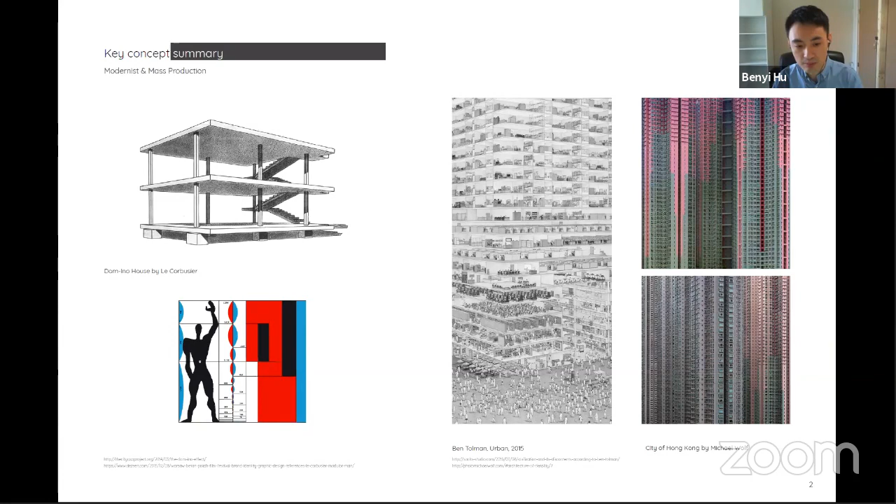Architecture under modernism's influence adopted a top-down perspective in design, as a visionary planner that often homogenizes the living condition by treating the user as generic instead of diverse individuals.

Over decades of technological evolution, digital technology has transformed the fabrication method from mass production towards mass customization. Different design fields also adopted design customization as an attempt to provide a tailoring service. The digital continuum presents a new degree of flexibility in design and fabrication.

However, this feature of technology is rarely being used to respond to the social diversities of the users, but is mostly being adopted in the conventional central decision-making process to achieve a wise plan imposed by the architect. Hence, it is necessary to deploy the advanced technology of mass customization and parametrics for a personalization culture in architecture.

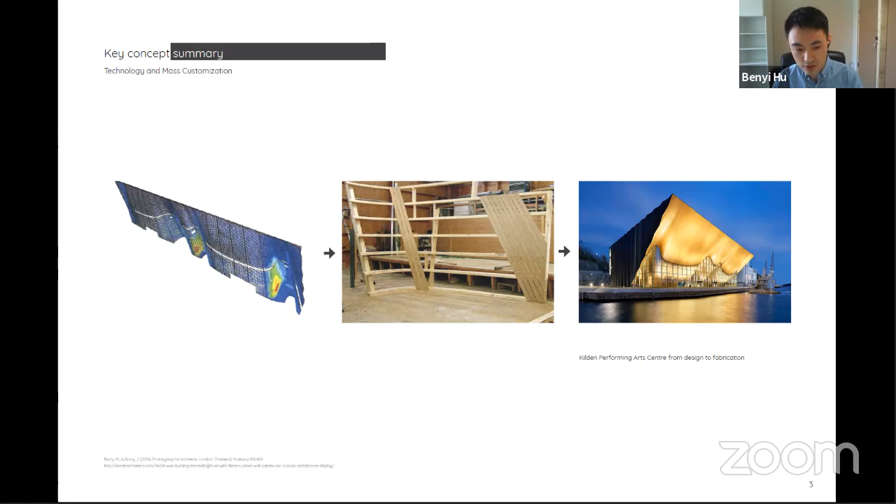A highly controlled built environment will lead to a homogenized and standardized living condition, often controlled by a small group of designers and their client. On the other end of the spectrum, a complete user-driven environment, as demonstrated by Kowloon Walled City, lacks regulation and systematic design strategy, which tends to become chaotic.

Architecture should find a balance between the two separate forces of control, allowing the architect to maintain its leadership role in the design, but offering flexibility for users to customize their personal space.

John Habraken's support and infill approach initiated a flexible design attempt to address the spontaneous variety of user preferences and unpredictability of future use. His idea of balancing the separate forces of control is based on his theory of natural relation, that built environment resembles an organism more than an artifact.

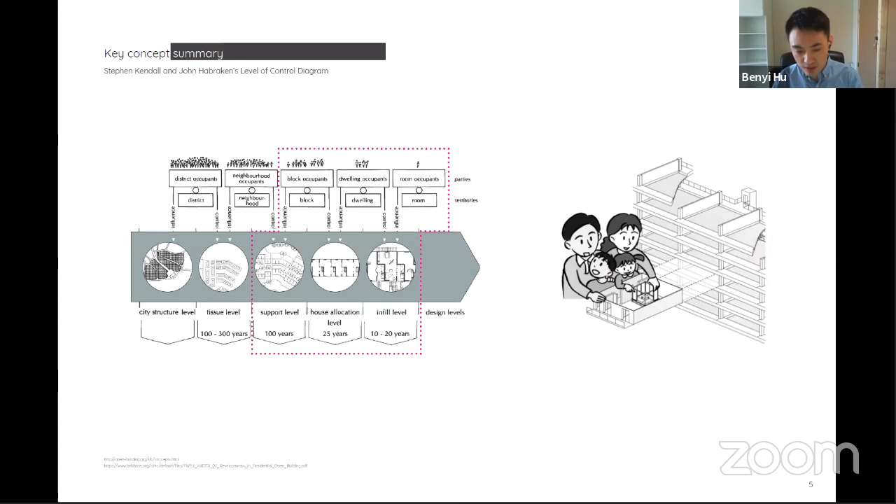The public engages with the built environment by acting on it rather than observing it. Habraken suggested a separation of different levels of control in the built environment according to the lifespan and volume of users. The three separated levels were created for his design of mass housing.

The support level is the overall structure and mechanical services. The infill represents the unit interior, such as partition wall and furniture. Lastly, the allocation layer is the boundary between the units.

This approach was intended to give users control of customizing their living environment without interfering with other fixed components of the building. However, due to lack of solution for the allocation layer and the void of systematic structure to guide the changes, most...

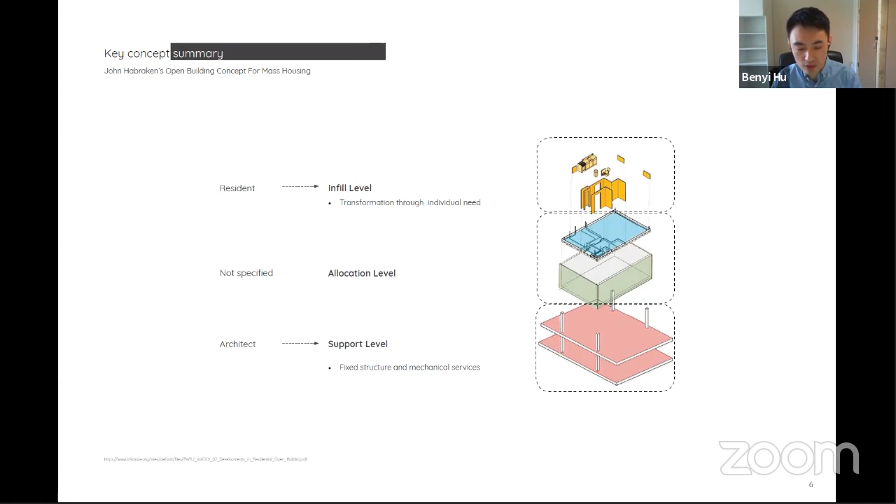open building projects remain fixed after construction and fail to deliver the natural relation as a diverse built environment that accepts changes and transformation. In addition, this dichotomy structure with only support and infill layers has undermined and limited architects' role in design to only the building shell, the vertical space division, and the service utility.

New technologies can be used to improve upon John Habraken's support and infill approach for the design of high-density housing. Parametrics can be used as an iterative design tool for user participation through establishing rules and relations.

An alternative design method can be developed to include the role of the user as part of the design decision process, but also maintain the architect's responsibility as a designer and planner of the built environment.

Therefore, incorporating the diverse needs of the users to customize the unit boundary through communication and neighborhood negotiation, guided by the parametric system. The role of the architect can also be expanded in the support level, from simply the design of fixed structure and mechanical services towards designing and planning an active neighborhood relation, as well as the functioning of a community to incentivize public interaction.

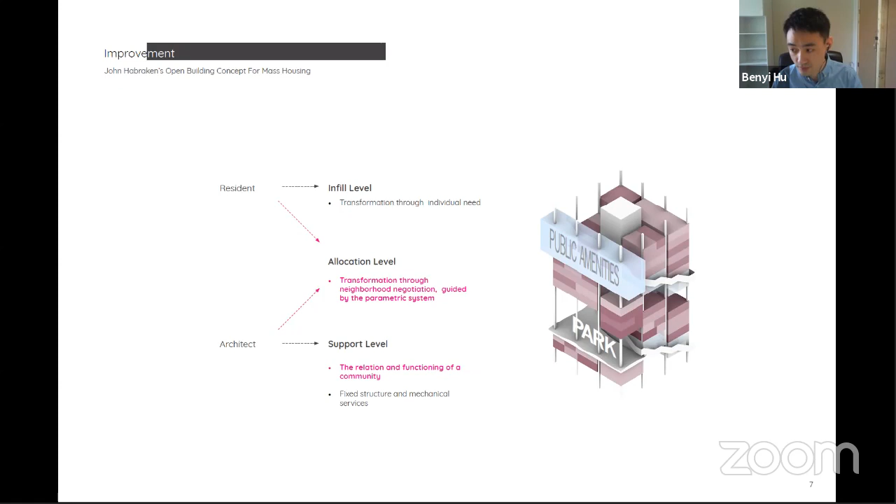This thesis investigates a network approach for participation, where the architect creates a parametric framework that reflects the different categories of users' needs and provides user access to the framework to customize and personalize their individual space within set limits.

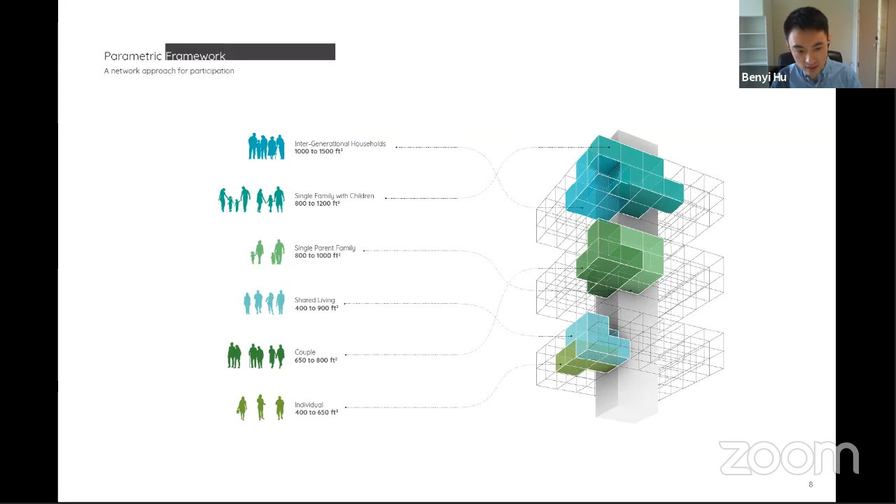A 4-meter grid system was proposed as the initial support level. The choice of center core design allows the majority of structure and services to be located either closer to the center or the edges of the floor plate, creating an unconstrained space between the corridor and the building facade.

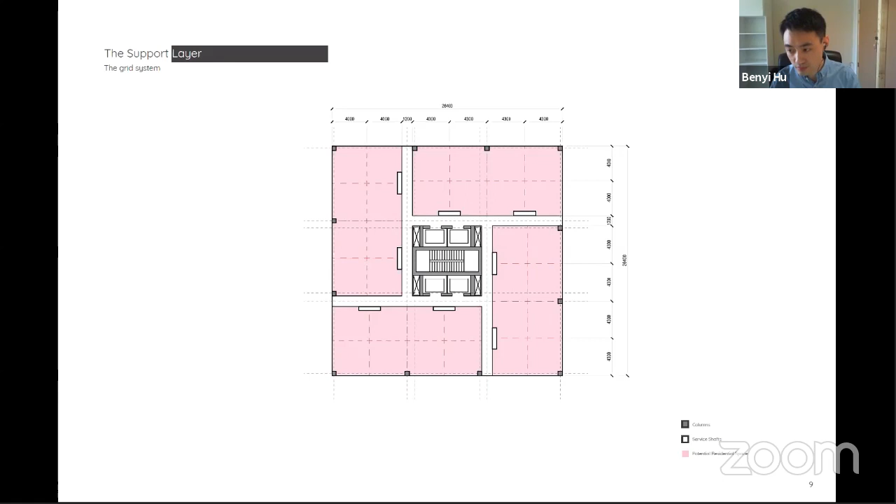Allowing future partition walls or demising walls to shift without interference, unit entrances are skip-stop for a multi-level design, providing various interior layout options and increasing opportunities for future changes. A parametric system is then created to work with the grid system to ensure each unit has access to the corridor as well as sufficient natural light based on the overall floor space and building envelope ratio.

The algorithm ensures the nearest cube from the source cube is selected first, providing efficient unit design with higher degrees of customization.

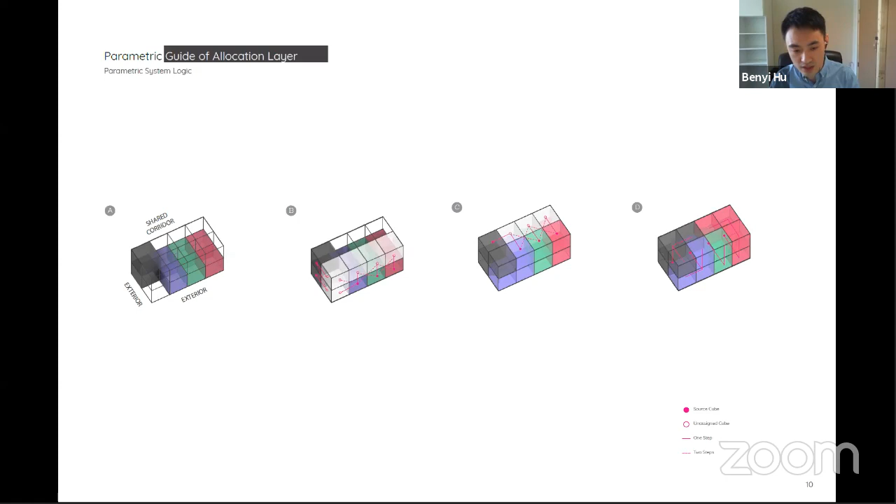When the user first purchases their property, the parametric model offers the owner an input of their spatial needs, then pairs and matches the user with other existing users.

The system was designed to treat the bulk of the vertical connected block as a single entity for unit subdivision. As shown in the video, with different input of unit area and total number of units, the parametric model can assign and arrange the space cubes to different households.

It ensures that the entrance, marked by the white dot, is skip-stop, and most entrances are positioned at the center level of the unit. When changes are required after residency, the parametric model can be deployed to offer users different configuration options or verify the input change of allocation to maintain a satisfactory living condition for all residents.

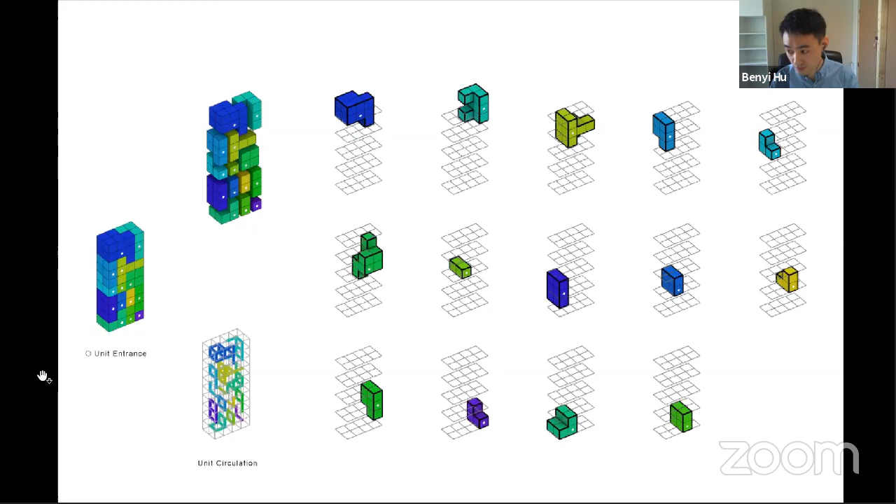Parametric design offers architects the possibility to design with variables for an interrelated and open-ended system. It operates with continuous associative geometry, which can be adjusted through the change of its input value without recreating the system.

The result of such design is therefore not a single object, but according to Gilles Deleuze, a class of objects that are all different as one for each set of parameters, yet all similar as the underlying function is the same for all.

Only a class of object can accommodate different scenarios with different variations.

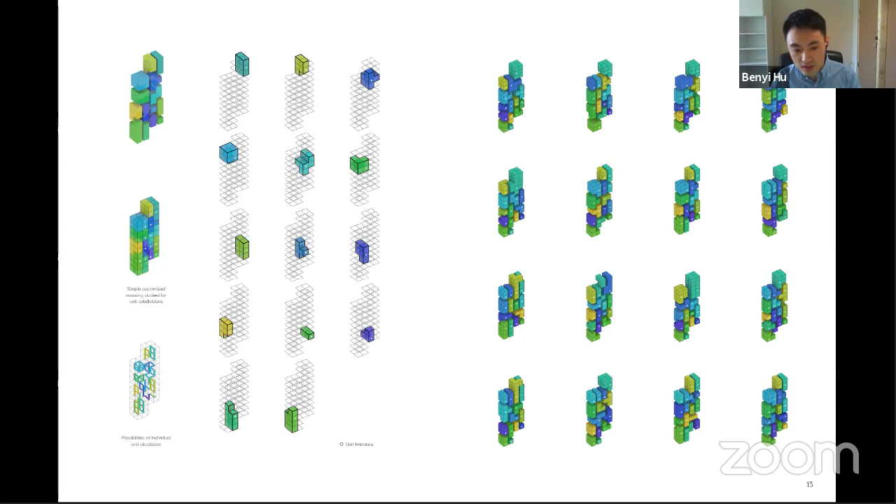I also tested this parametric system with different forms. In this one, the source block is vertically shifted. This parametric function can even be used with higher complexity of form that are partially carved out.

So instead of designing from a top-down perspective as a form of mass production with limited variation and identical copies of living conditions, the design of high-density residential could be optimized with our technology to adopt the essence of mass customization and parametrics for a personalization culture in architecture.

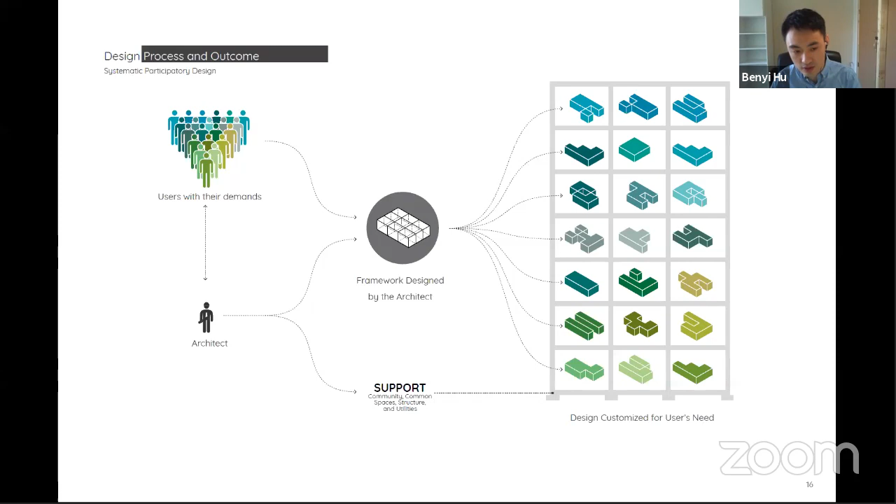The contemporary high-density residential projects have compacted the living space of society and shortened the distance among residents.

However, a denser living environment did not promote a healthier community, but instead isolated individual households into their personal space, bounded by the demising wall between the units. This untouchable space boundary has created a strict physical separation between the units, reducing the chance of cross-connection and causing segregation.

Therefore, having a flexible allocation level enables residents to resolve changes in their spatial needs, making community space an outcome of neighborhood negotiation.

The parametric system can offer guidance for changing the allocation level. Users are allowed to shift the space boundary at increments of 860 millimeters, which is the modular spacing.

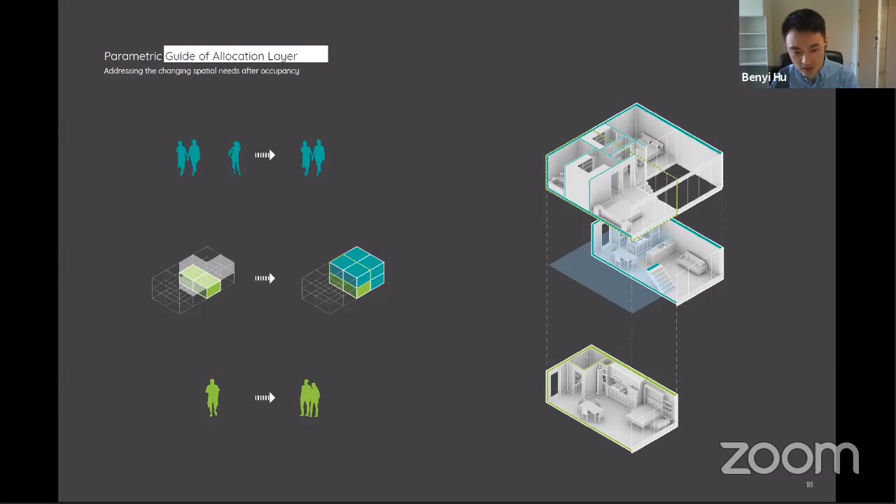Of course, an entire space module can also be transferred for larger space arrangements, such as an additional bedroom with a closet or a den as office space. In this case, when the Green resident got married, they could purchase the space module above the unit to expand.

Space could not only be transferred among units, but also shared. By permitting shared space, a commonly used space could not only offer value to others, but further enhance the relationships among community members. Therefore, two small student units with individual kitchen, dining space, and living room that is barely used...

...can be transformed to have a shared kitchen and additional bedroom to accommodate another student.

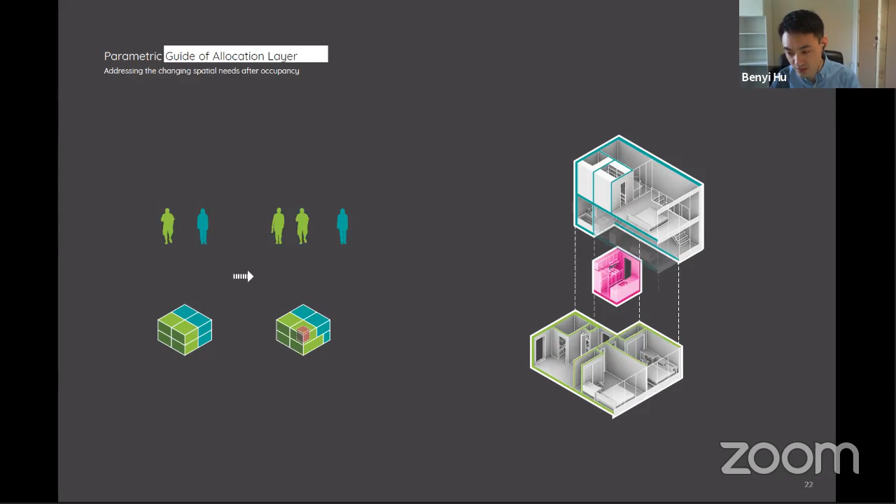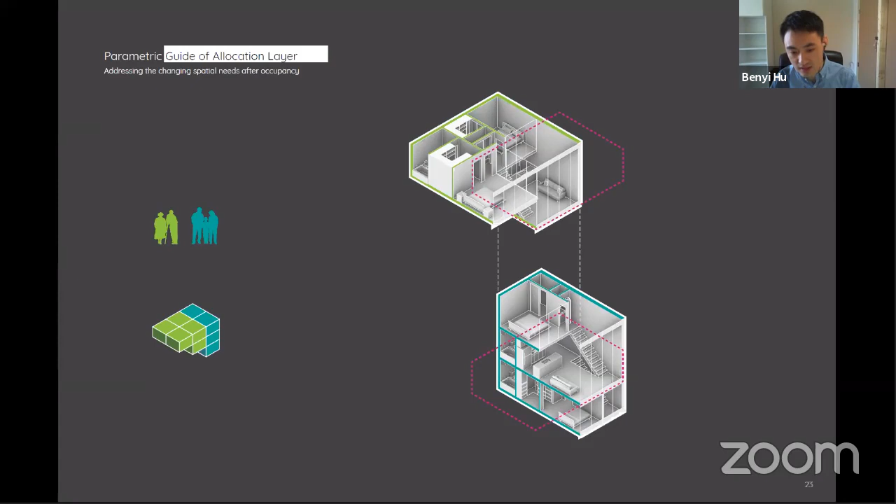This example shows the possibility that shared space can provide for transgeneration families. The contemporary residential housing design is limited in the size of the unit from a studio to 3-bedroom. Therefore, the transgeneration family can only live separately in 2 different units. However, a shared space allowed the 2 units to combine the kitchen and living room for common activities between the family members.

The mass production mindset has treated high-density residential units as mass-produced commodities with no interest to respond to individual need and failed to support the development of long-lasting relationships among the residents for a stable and healthy community. Therefore, the unit became a commodity that is often resold within a short time period.

The changing allocation level may not be able to offer all the changes of spatial needs. However, it does offer a bigger range of possibility when changes happen. It allows the community members to act as a collective group to resolve their issues. Consequently, a dense living environment could transform from a device that isolates and anonymizes individuals into a catalyst for a community.

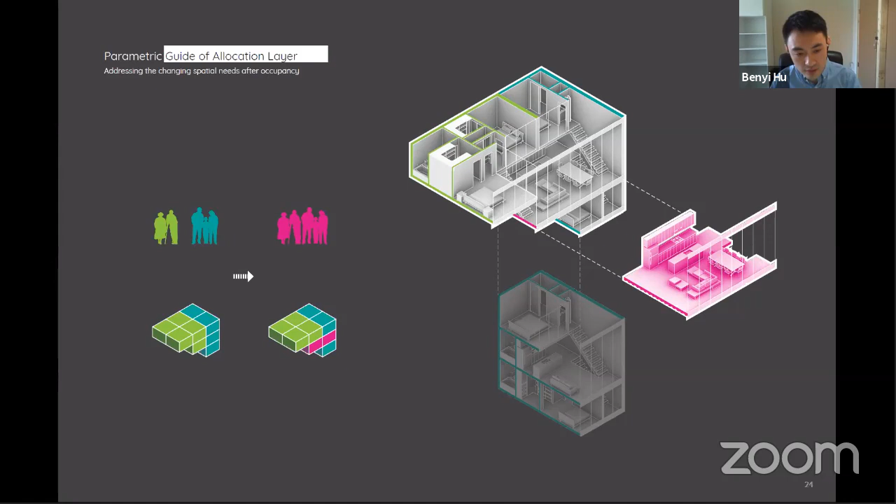This is a simulation for the transformation of the allocation layer based on the established rules mentioned in the previous slides. Through transferring and sharing unit spaces, after parametric unit distribution, we can see boundary lines between the modules are vertically aligned. However, as time progresses, the unit boundary will start shifting through neighborhood negotiation, driven by the needs of users, eventually developing its own pattern on the facade.

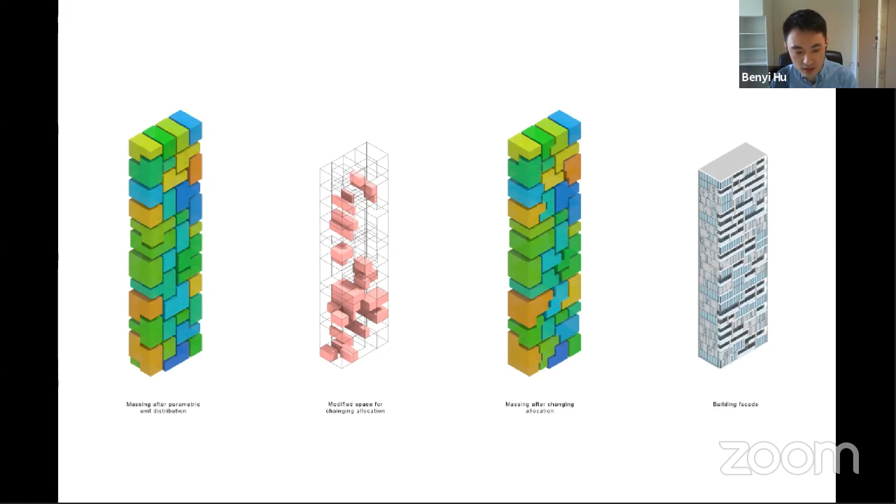The interior space and the facade would continuously evolve, creating a natural relation between the user and their inhabited space. The facade system is designed to maintain visual consistency, but also deliver customization options for the users to swap and change. Therefore, a window wall system is adopted to allow installation from the inside.

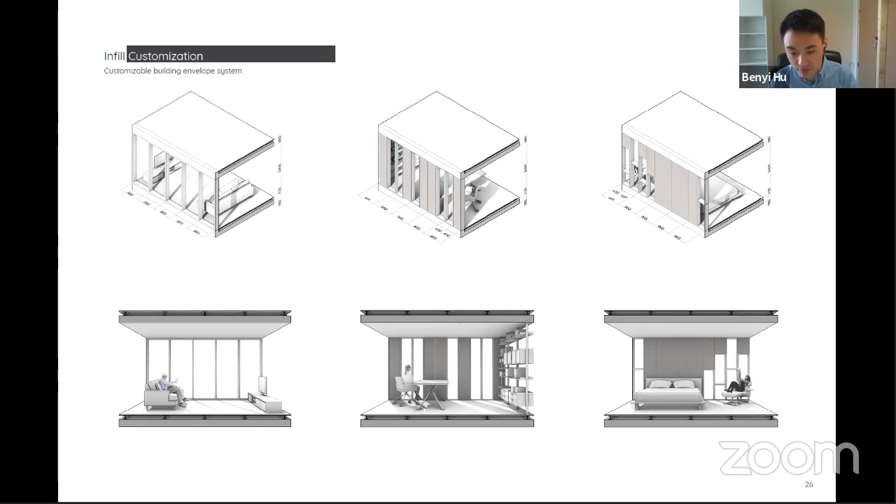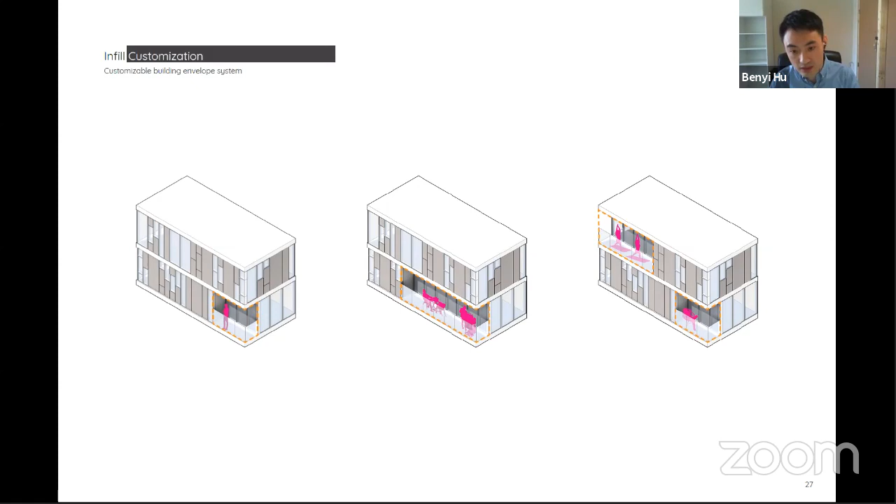The 3 different panel systems provide the user flexibility of choices between lighting condition, visual privacy, and furniture layout. Spaces like bedroom and office do not require fully glazed curtain wall, which could be partially enclosed for better thermal performance. There is also flexibility of choices between interior spaces versus exterior balcony. Various lengths and locations of balcony can be chosen based on user preference.

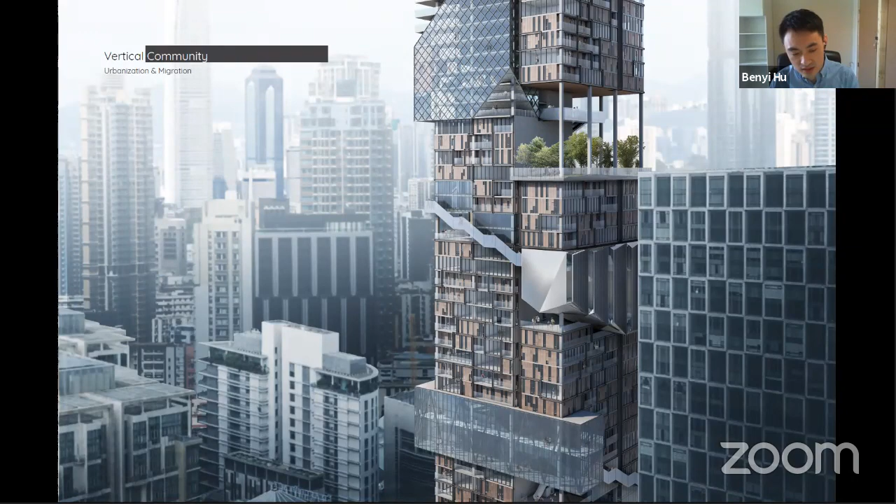Urbanization is one of the significant factors that will transform cities around the world by shifting population from suburban area towards urban area. The increase of density in megacities is addressed through vertical growth. Within a high-density megacity, the scale of population becomes disproportionate with the conventional classification of urban territories. The increase in population and density has shifted the conventional classification of territories up by 1 level. A high-rise residential tower can have the same population as a conventional block or neighborhood.

Therefore, mass housing with a single-purpose design that only meets the living standards of individual households is no longer applicable. The design of high-rise buildings needs to address the original function of a conventional block or neighborhood.

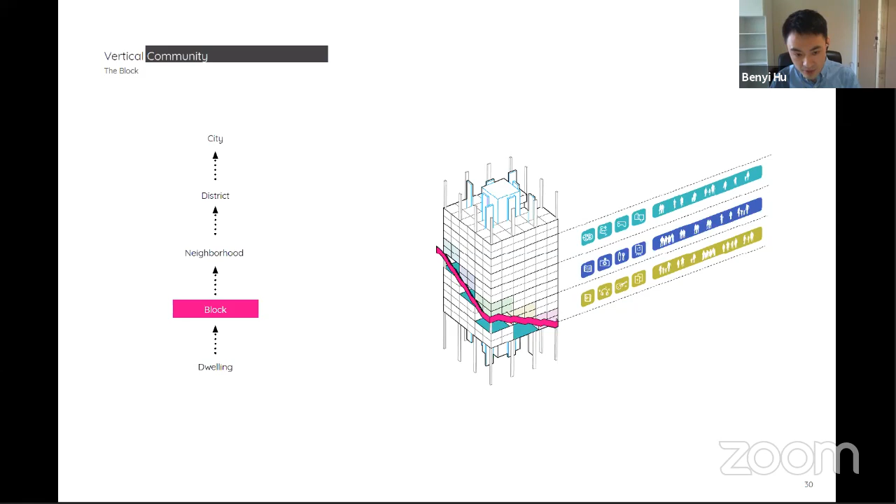The block level in the vertical community is designed to occupy 15 to 20 households. People are grouped with similar interests. On every 2 to 4 floors, they manage the space they inhabit in a collective control fashion. As Jane Jacobs believes, this type of small-scale community allows people to have an innate degree of natural cross-connection within itself to promote social interaction.

Therefore, both public and private shared community spaces are inserted within the block. These social activity hotspots could help stimulate intimacy within the neighborhood.

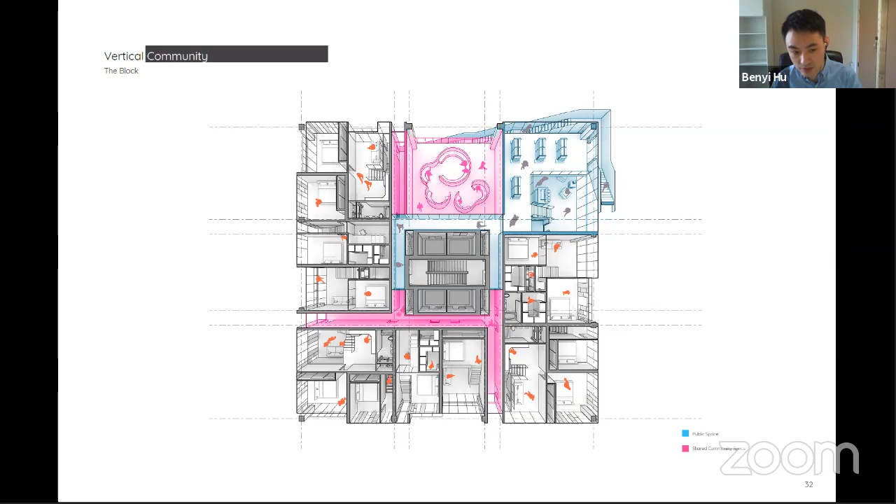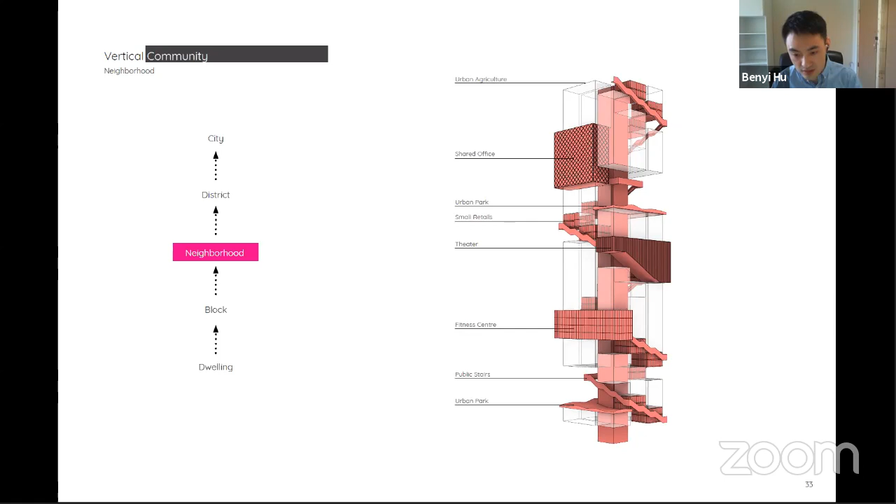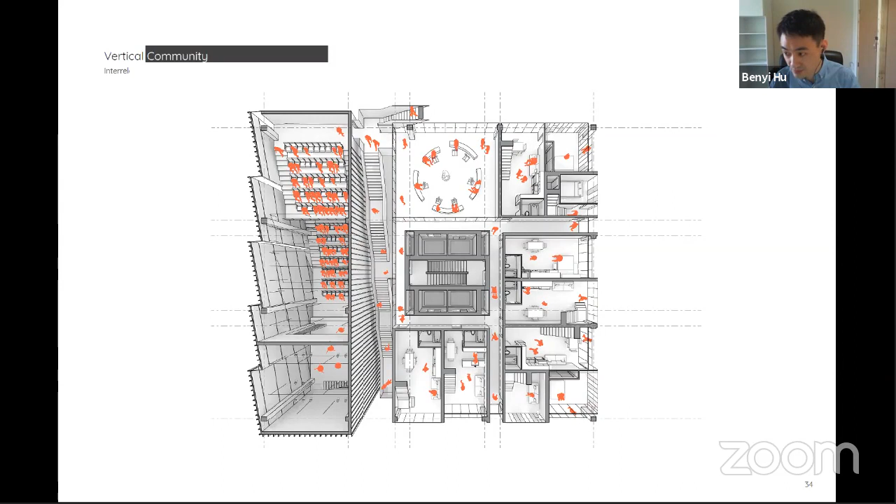An interrelation would occur between the public space and adjacent residential block. Residents would attend the social activities within the neighborhood. Additionally, the character of each block can be determined by the adjacent public program, which would naturally group people with similar interests. The form development of the neighborhood started with the conventional standard core and corridor design to maintain the efficiency of a high-rise structure.

However, as the height of the residential block is constantly growing, the amount of retail space on the podium level remains the same and has become disproportionate with the size of the residential space.

Therefore, the podium is vertically distributed along the helix stairway. This allows even proportion of commercial space versus residential space balance, as well as injecting social life into the residential space. The shared activity space for residents is also distributed along the helix stairway under the commercial space. This design strategy could resolve the privacy issue as the public uses the stairway.

The larger public anchor programs are then inserted into the neighborhood. Large public spaces are carved out from the residential block. The helix stairway was rerouted to reduce the travel distance as well as to offer different views of scenery along the stairway. The public anchor program allows residents

within the community to cross-connect and also interact with the public. Urban park spaces were designed within a high ceiling for better exposure of sunlight. Natural contours of landscaping and seating are combined for people to gather and relax.

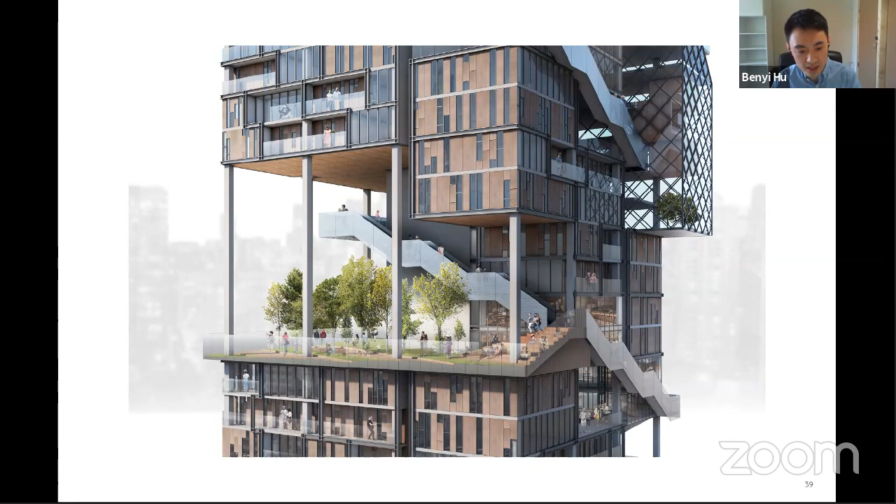The parametric can then be used to distribute the household based on users' space needs and common interests. After residency, the boundary of individual households can be shifted with changing allocation design strategies through neighborhood negotiation. Lastly, the customizable facade allows the building to constantly evolve to reflect the living habits of individual users.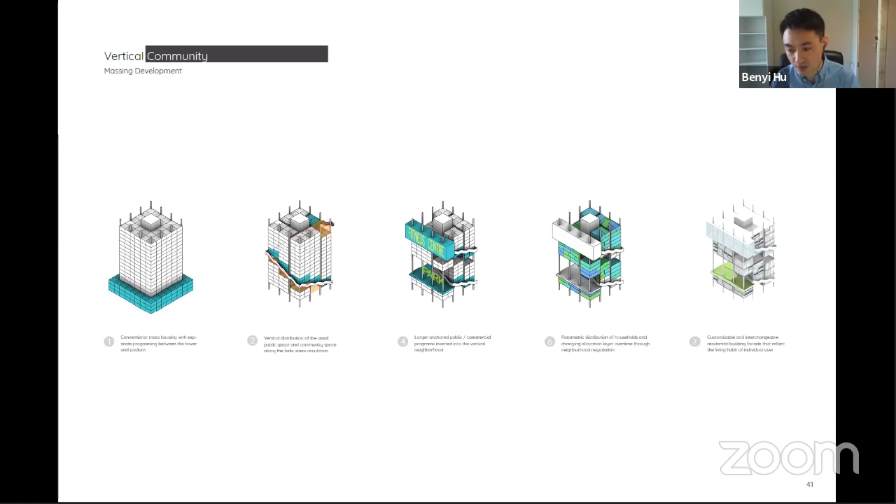The support level provided by the architect has then transcended from the basic structure of mechanical structure and mechanical services provided by John Habraken into the design and planning for an active neighborhood relation, as well as the functioning of a community for public collaboration and promoting intimacy within the users.

With the support of technology and innovative construction methods, the design of mass housing can transition and evolve from a product of mass production into a customized home tailored for the user and supported by the neighborhood.

Just like what Mario Carpo said, all that is digital is variable, and all that is digitally variable is potentially open to interaction, communality, and participation.

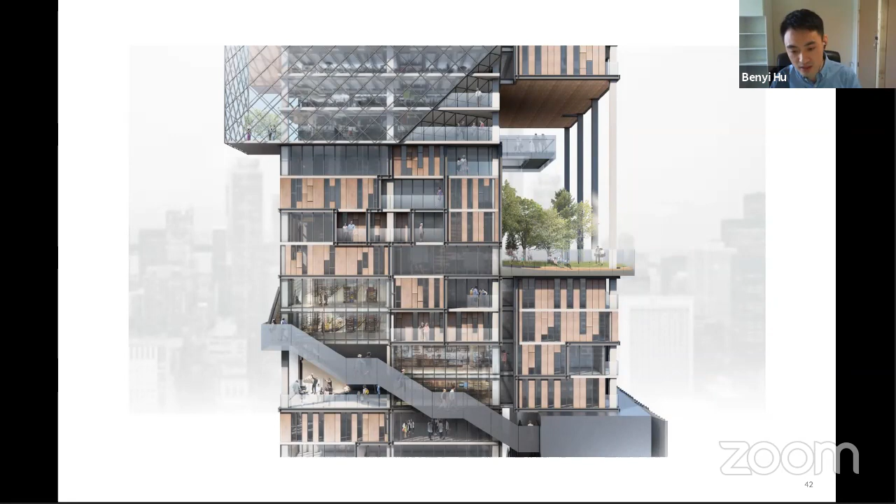This approach shifts the design of high-rise residential from stacked plan layouts with monumental facades into a dynamic system that always maintains overall coherence. In this case, the parametric is no longer in service for a particular style from a single hand, but helps the community members and architects collaborate and design through many hands.

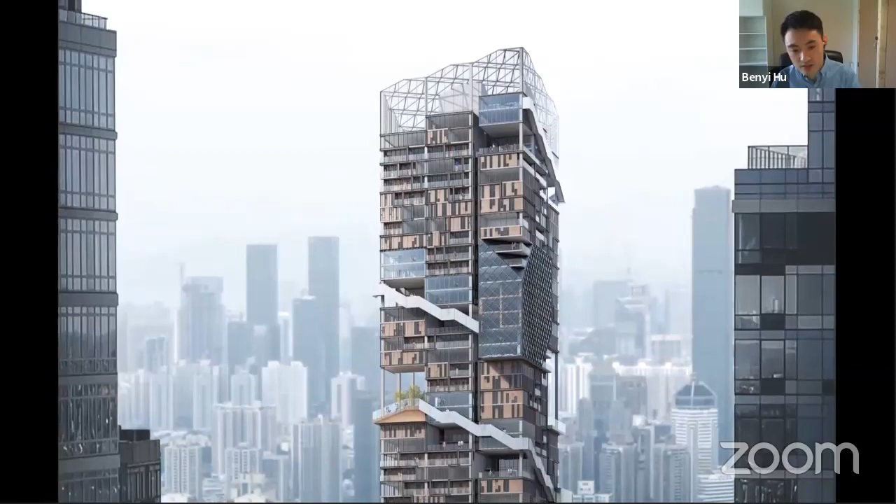Architecture under the influence of industrialization and mass production has developed a culture of design towards uniformity and standardization. This thesis explores the possibility of deploying the advanced technology of mass customization and parametrics for a personalization culture in architecture.

Consequently, incorporating diverse user preferences and the changing needs of the social environment to transform the living condition of high-density residential from homogenized towards individually initiated flexibility. The intention is to support a personalization culture in architecture that could incentivize people's emotional connection with the physical environment, and make architecture more sustainable by establishing an enduring relation with the user.

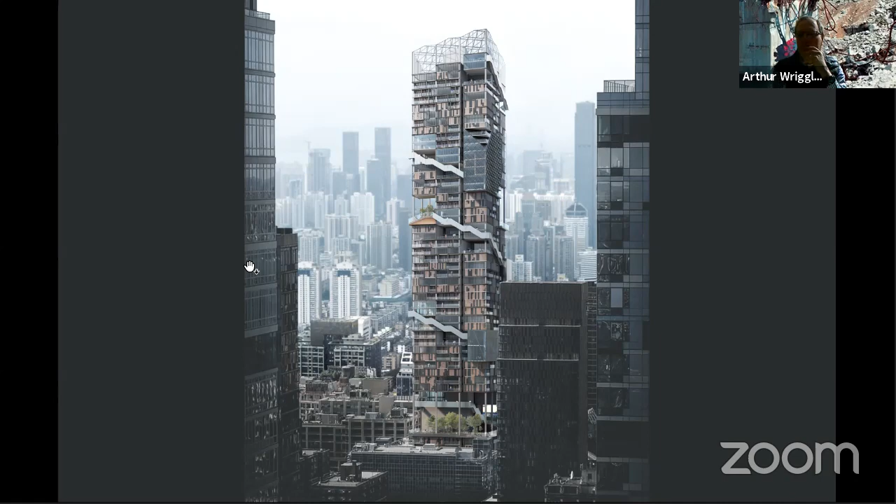Maybe Benyi, you could go to one of the slides where you have the floor plate highlighted. For me, one challenge in this, in the time frame of a presentation like this, is how do you touch all the complexity, and his ambition to—

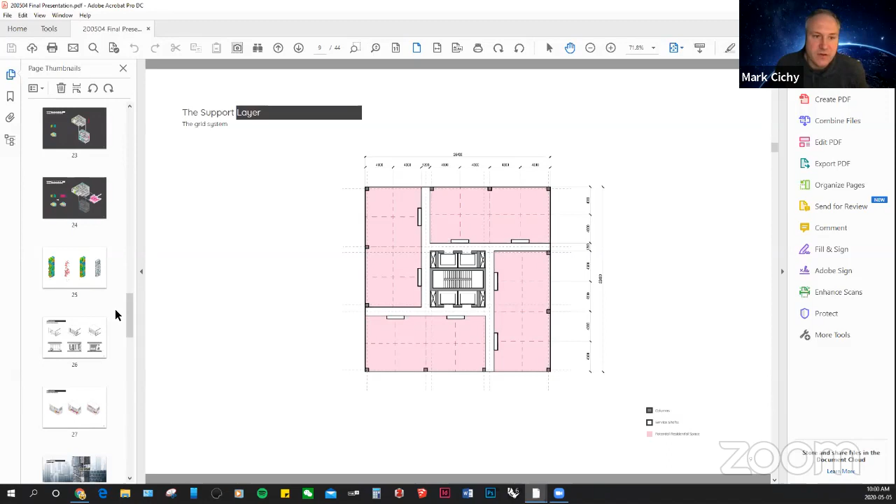Well, I want to ask about the script, but right now I've read the book, so I'm familiar. If you want to point to specific pages or whatever, I have it open as well.

Do you want to describe some of the support things that you've considered to inform the way you designed your building? Okay, yeah. So first of all, the building adopted this kind of pinwheel design, and it's a 4-meter module.

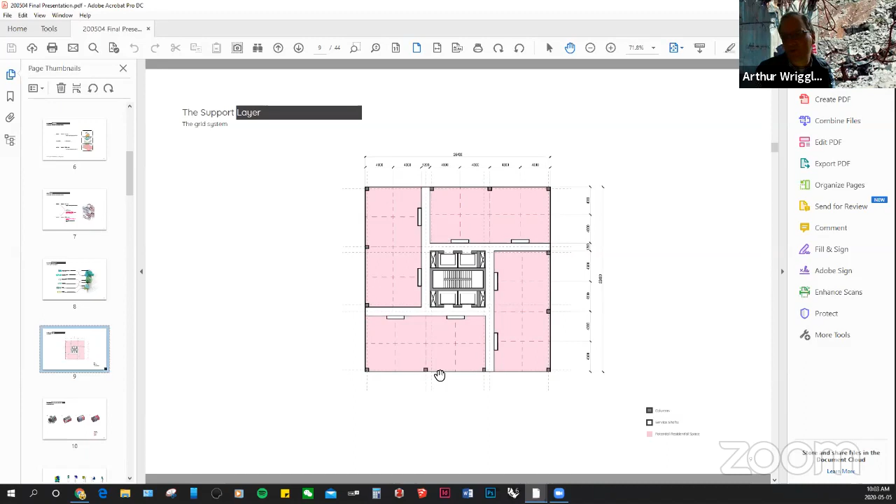The plan is useful because it just shows you what your intent is in terms of services, but I would imagine that those things would be part of your, as you called it, quote unquote algorithm or script. Are they not?

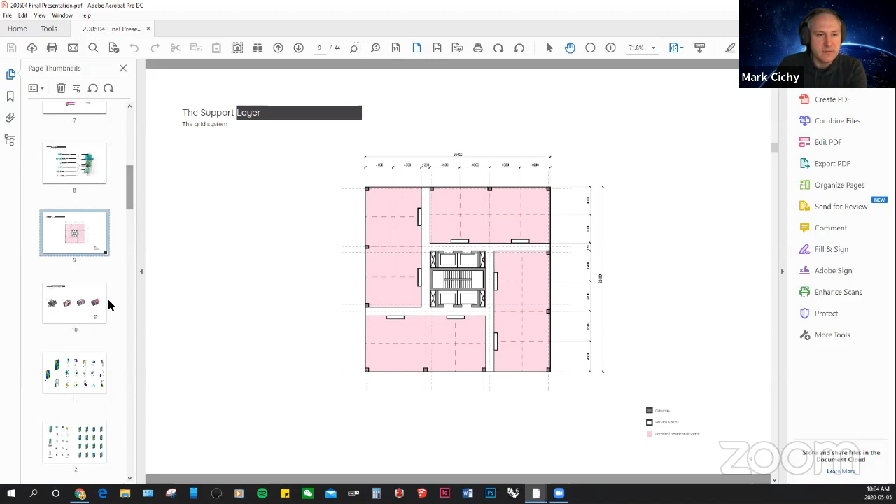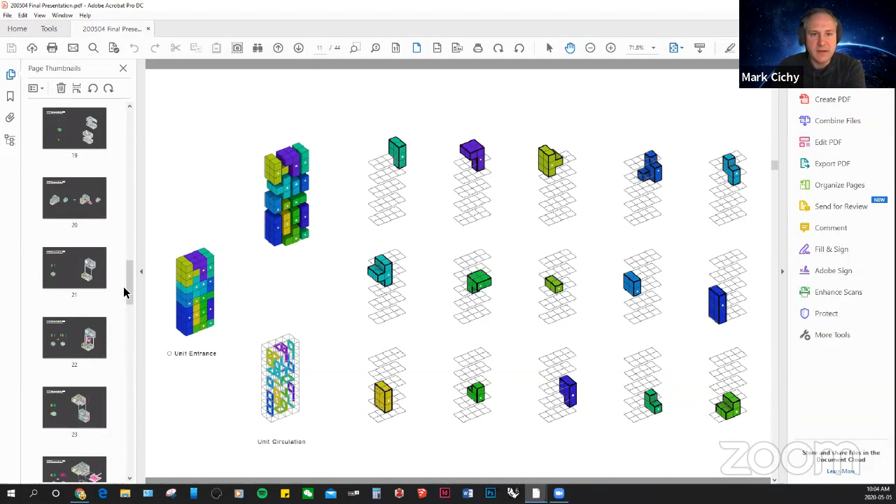So you're asking, does these diagrams have like... Yeah, so in the plan you just showed me, where you had the little white boxes that indicated what the services were or where the services were, like on the demising walls, I was wondering, when you have these isometric drawings where you have these kind of Tetris pieces, is there any limitation as to where these things can be conjoined or touching each other?

So I guess what I'm looking for, this kind of goes to a second question. I'm sorry for broadening this, guys, but the script itself, you call it an algorithm, but I would imagine there are a lot of us on this call who know it's not just an algorithm. There are deliberate decisions made that are a series of modules that say do this, if this, and that sort of thing. And I guess I'm wondering, you're making decisions regardless. Maybe this goes back to Vince's initial point, you're making decisions as to what can be locked and what is flexible, right, as part of the design process. I mean, that's part of your architecture. That's your intervention, let's say.

So it's just like when people build a car or design and buy a car, they're given the perception that they have control over customizing the thing. But really, the body is the body, the engine is the engine, and there are some things you can bolt on, and it's mostly superficial stuff. I think you're arguably going beyond that and saying it's a little bit more than just superficial customization, because you're allowing actual pieces to move around. But there's still an element of intervention as an architect, as the designer, to say that this thing is locked to a certain degree, and here are my parameters and the things that are locked and how they're interconnected.

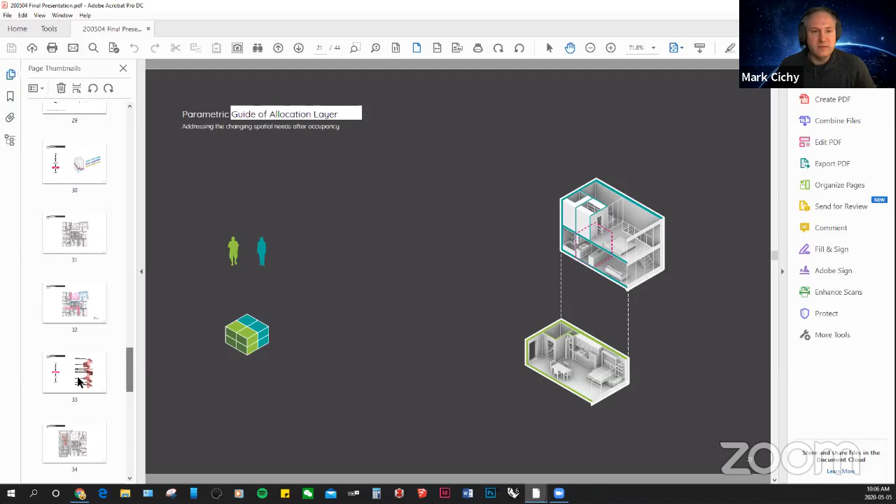And I guess that's what I'm asking, where is that? How's that described? Not just on the level that you're showing pretty isometric drawings, but also in your script. Do you decompose your script and say this is what this functions as, part of my quote unquote algorithm, which feeds this and that sort of thing? Because I think that's just as important as describing visually what's happening in this context, in this forum that we're having right now. Right, so, sorry, I'll leave it at that. I'll stop talking.

Then maybe I'll pick that up a little bit differently. I'm trying to figure out, you did a really comprehensive analysis of a lot of precedents, and I think it was very consistent. You're sort of challenging this idea that these things are kind of given, and then you don't get as much of that engagement. And Mark sort of makes the point, you also make the point that Mark did, which is on the document about customization of a vehicle and what does that mean.

And it's peculiar because you use the example of Twitter, Facebook, Instagram as platforms that give you an open framework to customize. I wonder, how do you reconcile the difference between a company that owns the means of production offering a platform, and the role you as an architect play in this? There's a difference between Mercedes-Benz letting you customize your vehicle, and an architect who doesn't own a building letting a user provide input. How does the architect and the user engage in that process of production to address the cost, economic implications, and ecologies around making a building?

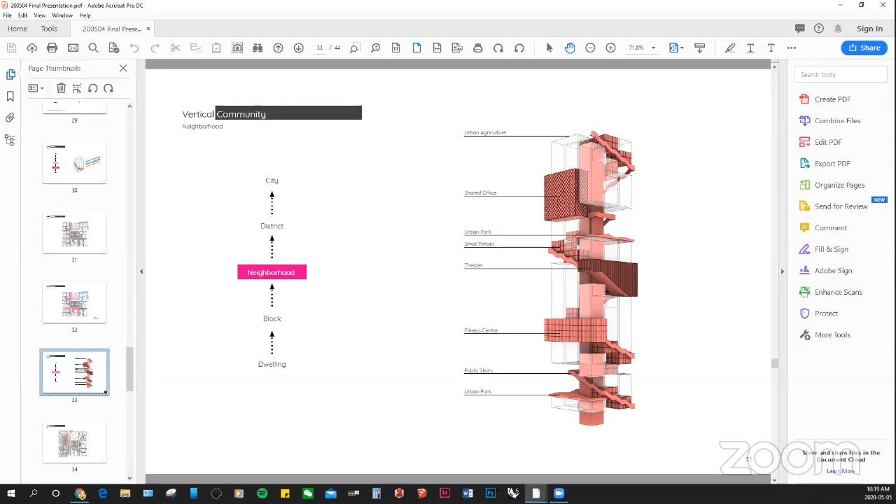Where I was going at the beginning, and what David is bringing up, is a good perspective as well - it's ironic that we're sitting here discussing this. I totally get where Arthur and Vince are coming from, but it's funny - I'd argue that from certain perspectives, let's say from a certain individual's perspective, like the owner being the developer, right, that has the most money to fork over on purchasing land. And maybe that's not the model for this, but let's say that's one thing. And the other thing is the constructor. Those are the people, ironically, that you need to convince - to them this seems radical, like alienation, like building on Mars. From a certain perspective, that's who you're convincing.

Is this impossible? Absolutely not. Are we asking you to detail the mechanical systems and suddenly become a mechanical or structural engineer? Absolutely not. But what we're saying is there's another layer of viability that's missing that could be added, like Vince says, that would make people look at that and say, oh, you know, that looks like this - that isn't foreign like Arthur is saying. It's not really flipping the model on its head - there is rigor and a system here that I can get my head around that makes this something. I think what you're talking about here creates both stimulating architectural interest, spatial interest, and generally a new way of looking at things.

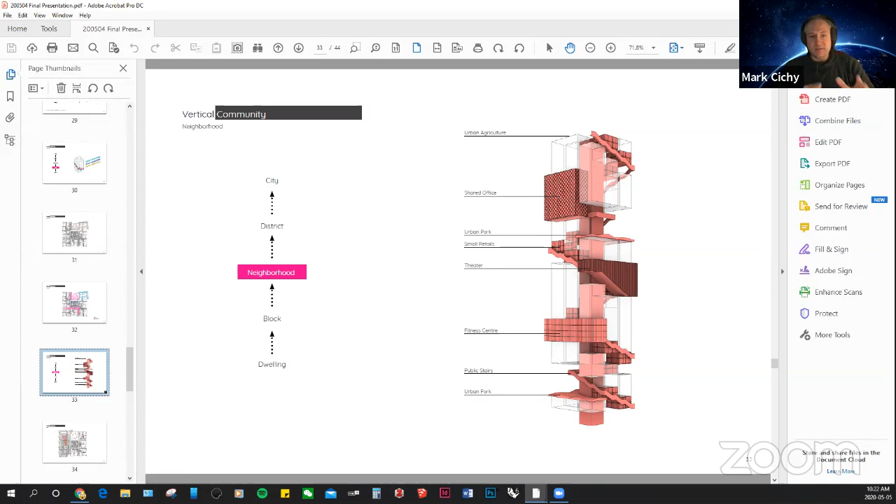But I truly do feel that, for the most part, that's why I'll echo that the graphics are well represented, the ideas are concise. That's why we're able to ask for these things. That's what I'll leave with.

Well, maybe is it time for last comments, or does anyone else want to throw in anything before - I mean, one last comment I can say.

Since you're looking at this - I mean, Benyi, I think this is a topic you're engaging in that will always be contentious. It would always raise eyebrows and always be challenging. And it's not because, as Mark says, this is long overdue - it's that there are easy ways to dismiss it. So it's important that you become aware of the space in which it exists.

One of the dimensions worth noting is that in the continuum of industrialization, we went from hand tool technology - using our energy to make things - to using our intelligence to also think about them. Then we used our intelligence to make machines that use oil to make things. And now we're at a point where our intelligence is used to create constructs that think for themselves, that execute and automate processes of logic. Parametricism, or the idea of using associative design, isn't quite there yet, but it will eventually become some of it - like when you model something, you're not defining all the vertices.

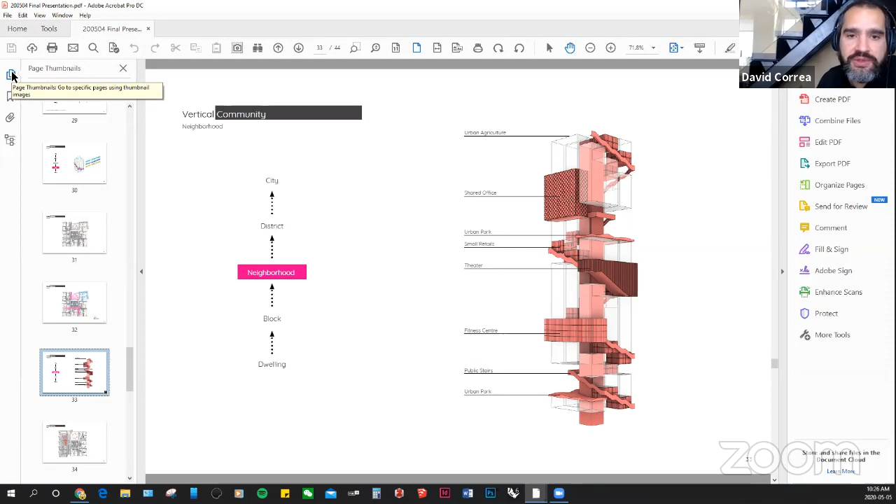That's it. And my final comment beyond that, your document is very comprehensive. I'm only critical of it partially because I want you to be empowered to move forward, right? And that's also, I think, ultimately the goal. So I don't necessarily have a comment I would put on the document, but I do have a comment: think clearly and try to understand very critically what the role of these tools are beyond the form and the space generation, or the architecture dimension of it. That's it. Thank you. Cool.

Maybe I'll say in closing, it's been a pleasure working with you this year, Benyi. I have been, a lot of the time, uncomfortable with your work in that you just kept making it broader and broader and broader. And I'm now seeing at this stage, finally, why it needed to get that breadth - for you, what we're looking at right now in this image, to build your argument, you needed the public in that building. It couldn't just be a residential tower and solve that enough.

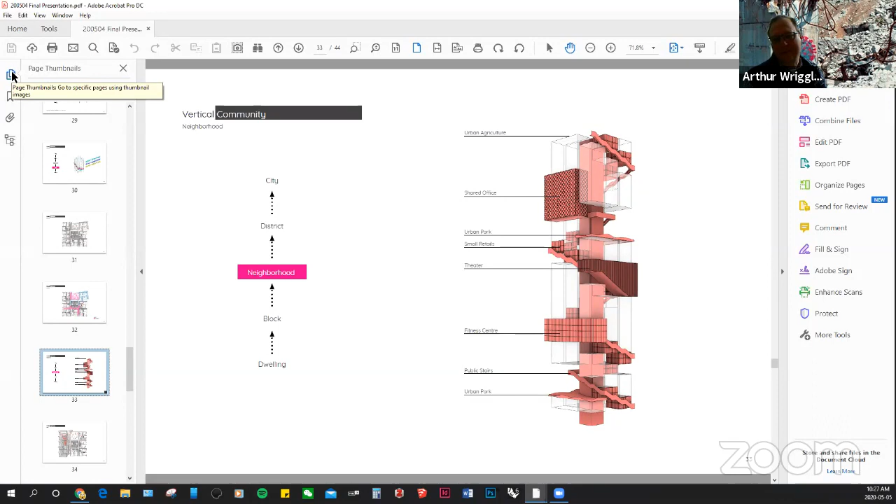I've really enjoyed coming along with you for the ride. For me, it's amazing where this conversation today has gone, beyond the work that you've presented to what the work is suggesting, the questions we want answered - we were all greedy, and in the end we want to know more. So no matter how much you answer, there's always more to be asked of you. Thank you for this work you've presented today, and the work you've done over this year.

Thank you. Okay, are there any more questions or anybody wanting to wrap up any comments? Okay, well, congratulations, Benyi, on a wonderful presentation. It really is inspiring. I agree with all of the critics. The imagery, the concept, the execution was really masterfully done. So yeah, my heartfelt congratulations to you.

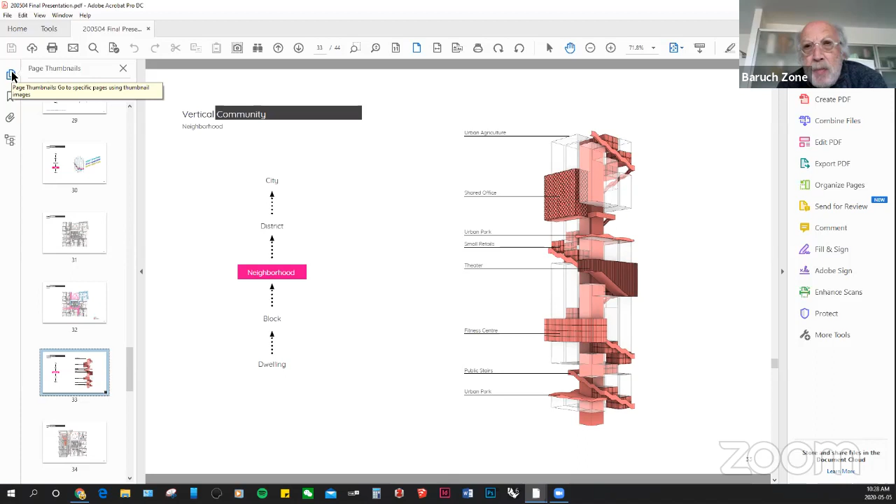Thank you. So I guess at this point in time, I might have asked Benyi to go on mute and we continue. No, not just kick him out. Benny has to leave the meeting. Okay, I'll get out of here, hang on, Benny, before you do, before you run away. Hey, Mark, you look like me. Yeah, I'm catching up. What is good looking? You look like me.